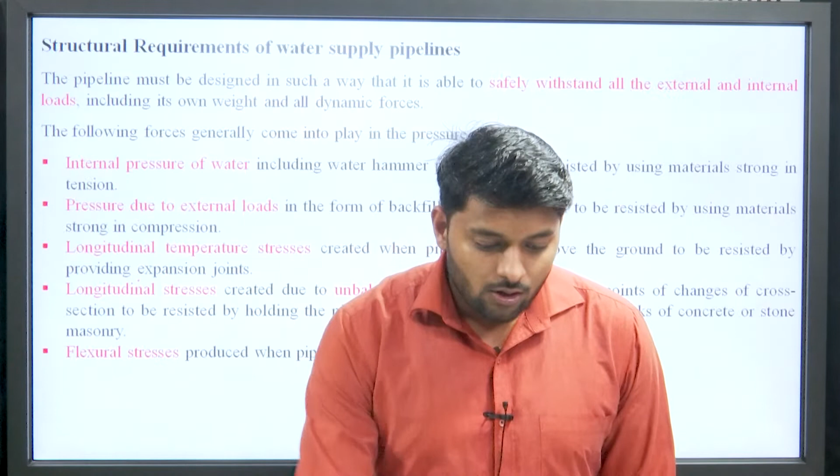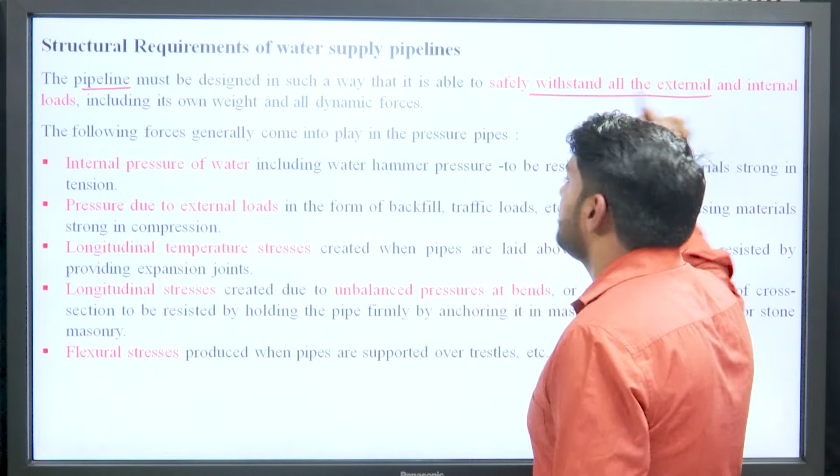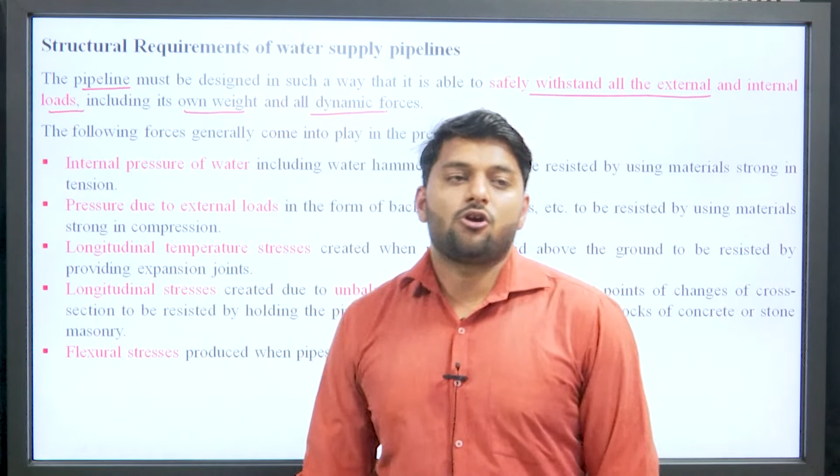What is the structural requirement of water supply pipelines? Basically, the pipeline which we design for water supply should be capable of withstanding all external as well as internal loads, its own weight, and different dynamic forces acting on the pipe must also be considered.

When we group all the different forces, the following forces come into play. First is internal pressure of water, which includes water hammer pressure. This water hammer pressure is resisted by the pipe material itself, and the pipe material used should be strong in tension.

Next is pressure due to external loads, which includes backfill, meaning the external loads can be in the form of backfill or traffic loads. This type of pressure is again resisted by the pipe material, and that pipe material should be strong in compression.

In case of water hammer pressure, the pipe should be strong in tension, while in case of external loads, the pipe should be strong in compression.

Coming to the next stress, that is longitudinal temperature stress. This type of stress comes into existence when the pipes are laid above the ground, and it can be resisted by providing an expansion joint.

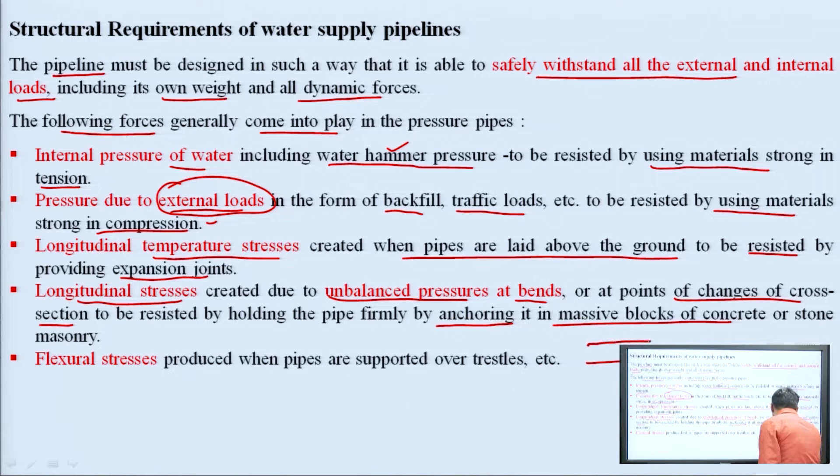At point A there is a bend, and at that particular point there is development of an unbalanced force, and because of that unbalanced force there will be development of a longitudinal stress.

Coming to the next stress, that is flexural stress. Flexural stress is produced when the pipe is supported over trestles. For example, these two are supports and the pipe is passing above it. What happens when water flows through this pipe? The pipe tries to bend, and there will be development of flexural stress.

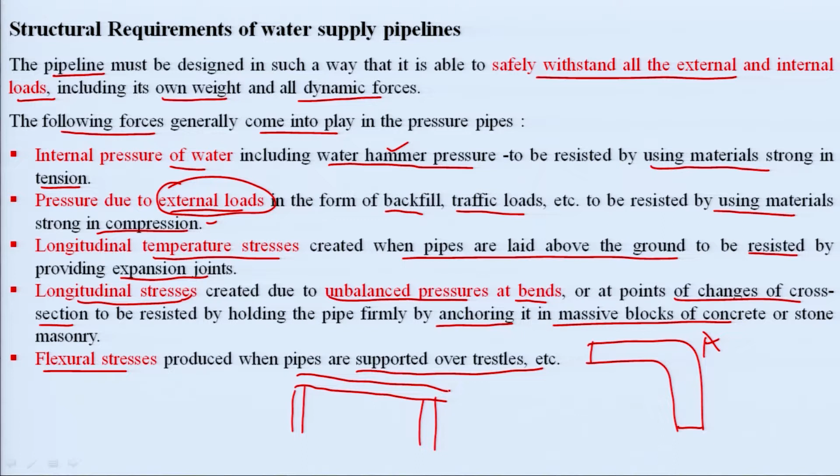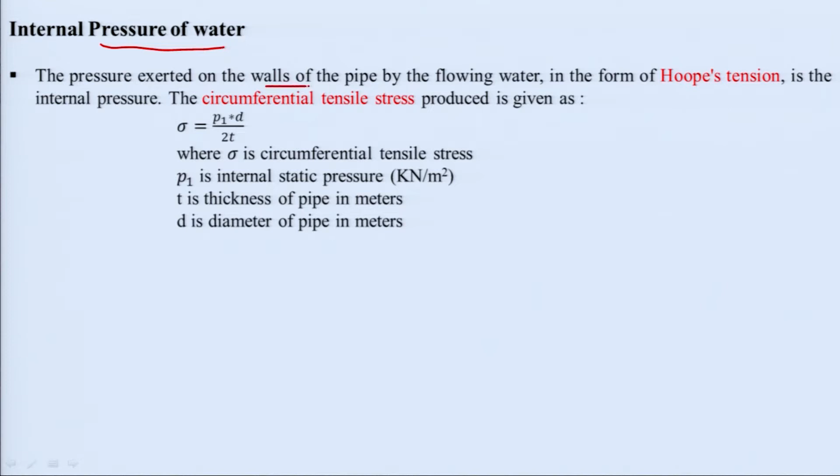What will be the internal pressure of water, or how can we calculate it? As the pressure is exerted on the walls of the pipe by the flowing water in the form of hoop tension, the value of circumferential tensile stress will be sigma equals P into D by 2 into T. How can we get that value?

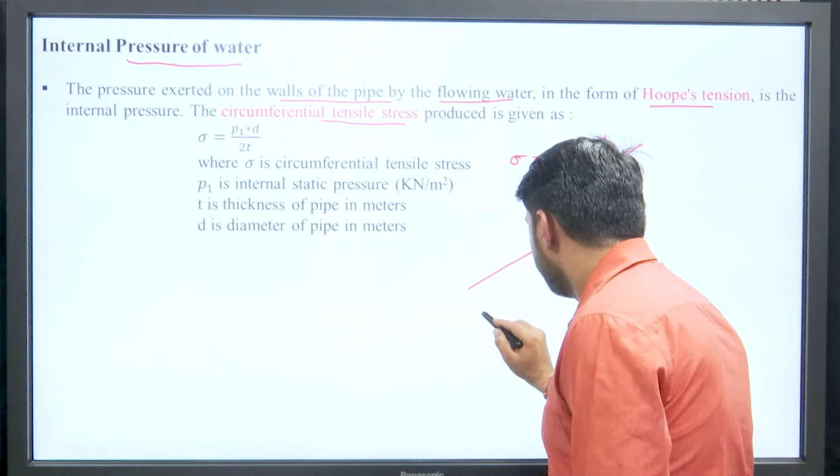Consider a pipe. The pipe is having a thickness T. So there will be existence of pressure and that pressure will be resisted by stress. Here, a stress develops and that value is sigma. A similar stress will develop on the other side.

What will be the value of force? In order to get the force, we simply multiply sigma by area, sigma into area. What will be the area? Its area will be equal to L into T, meaning the length and the thickness of that particular pipe. As the stress develops on both sides, it will be multiplied by 2, meaning force developed equals 2 sigma into L into T. And what pressure is applied by the water?

That pressure will be on that particular portion. So if we draw its top view, it will look like that, the pressure exerted by water from that much portion. In order to get the value of force, we simply multiply pressure into area. What will be the area? Its area will be diameter into length of pipe.

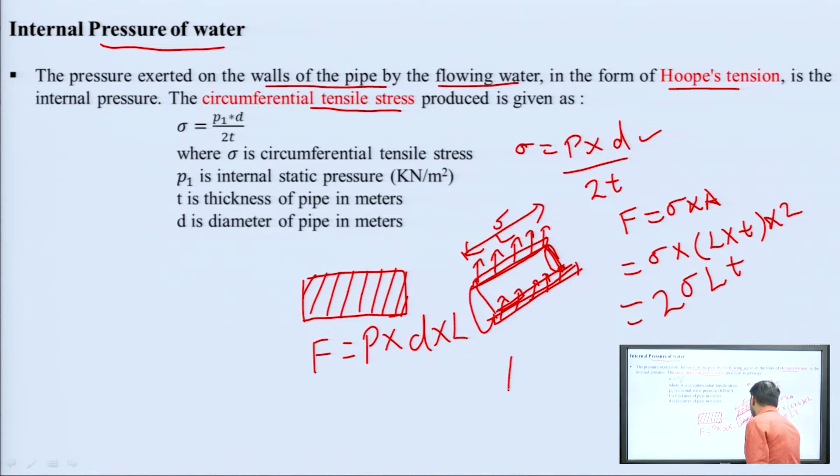Equating both the values, what do we get? P into D into L equals 2 into sigma into L into T. L cancels out, and sigma will be P into D by 2T. So this is the value of sigma.

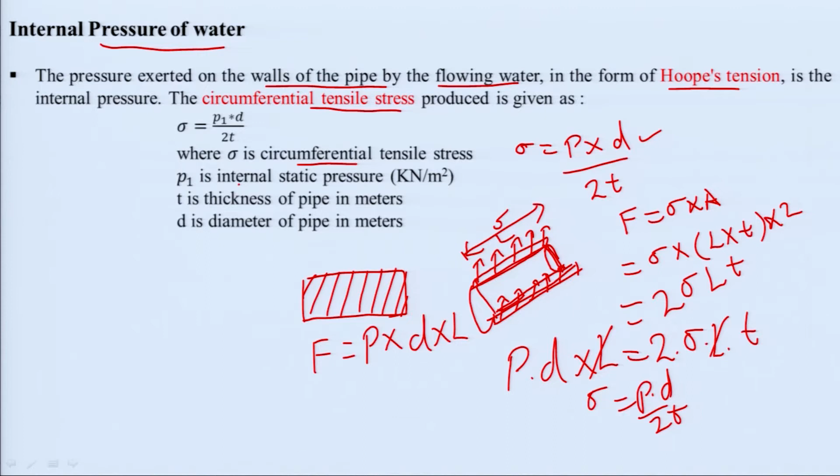And how can we get the value of sigma? Here sigma is the circumferential tensile stress, P1 is the internal static pressure in kilonewton per meter square, T is the thickness of pipe in meters, and D is the diameter of pipe in meters.

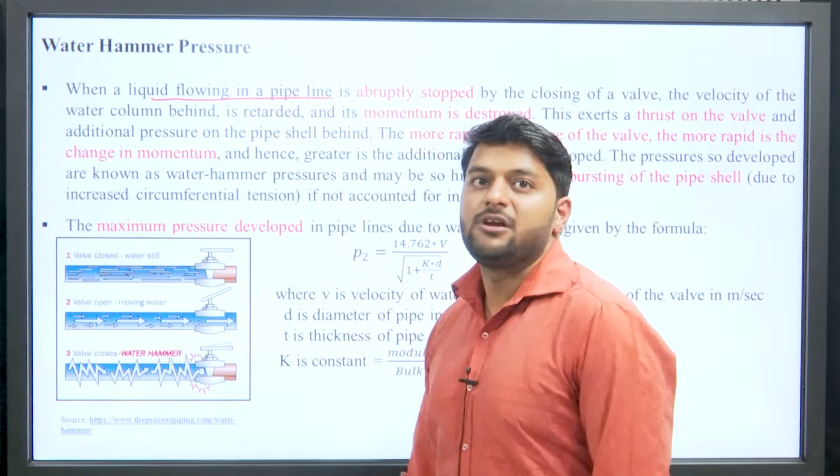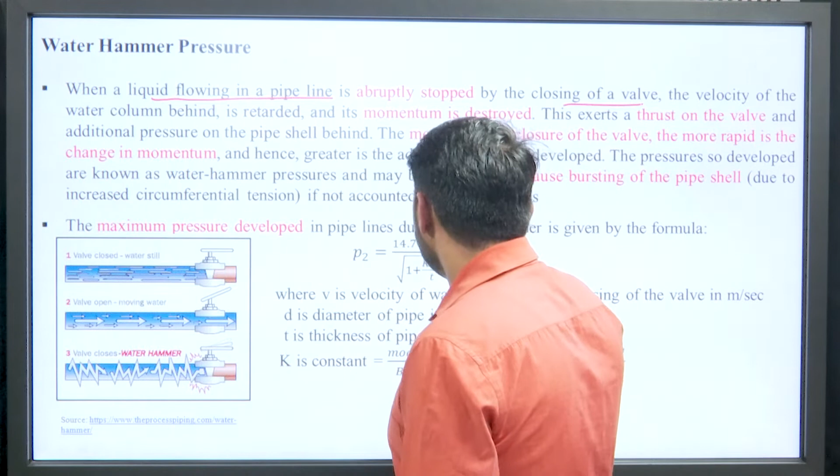Next is water hammer pressure. What is water hammer pressure? Basically, when a liquid flowing in a pipeline is abruptly stopped, by closing a valve, the velocity reduces to zero. If the velocity reduces, momentum is destroyed, meaning momentum also reduces, and this exerts a thrust on the valve and additional pressure on the pipe shell behind.

This is the case where water is flowing continuously. If we are going to close the valve, what will happen? The valve is closed and the flow of water is abruptly stopped, and the flow of water exerts pressure on the valve as well as the surrounding shell of the pipe.

What results? The more rapid the closure of the valve, the more rapid is the change in momentum, and greater will be the additional pressure developed. Rapid closure of valve means rapid change in momentum, and greater development of additional pressure. This pressure so developed is known as water hammer pressure.

The pressure developed because of the sudden closure of valve will be known as water hammer pressure. And what will be the result? It will cause the bursting of the pipe. The pressure becomes so high that it bursts the pipe.

How can we calculate that particular pressure? For estimating the value of water hammer pressure, we use the expression P2 equals 14.762 into velocity. Here P2 is water hammer pressure, and V is the velocity of water flow just before closing the valve, in meters per second.

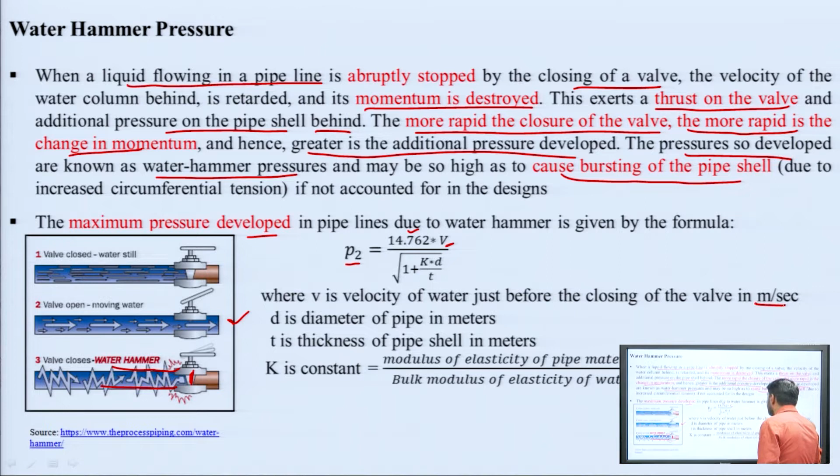What is D? D is the diameter of pipe, and T is the thickness of pipe. K is a constant, which is the ratio of modulus of elasticity of pipe material and bulk modulus of elasticity of water.

How can we get the value of K? For steel, the value of K comes out to be 0.01. For different pipe materials, the value of constant K will be different. For cast iron pipe, the value of K is taken as 0.02, and for cement concrete pipe, the value of K is taken as 0.1.

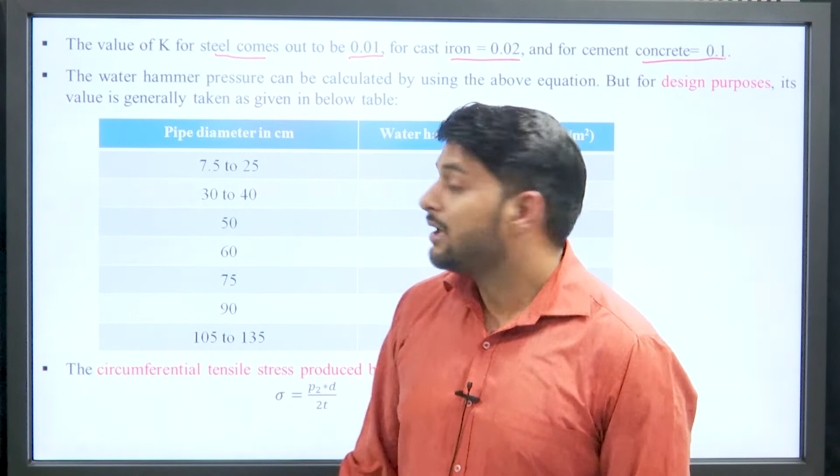While designing the water supply system, what value of water hammer pressure should be taken? For design purposes, if values are not given, we can take this much water hammer pressure for different diameters of pipes. This water hammer pressure can also be calculated using the formula mentioned earlier.

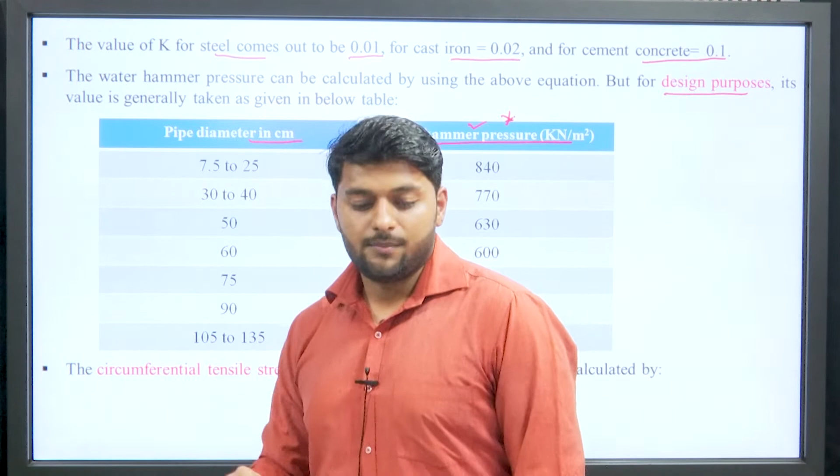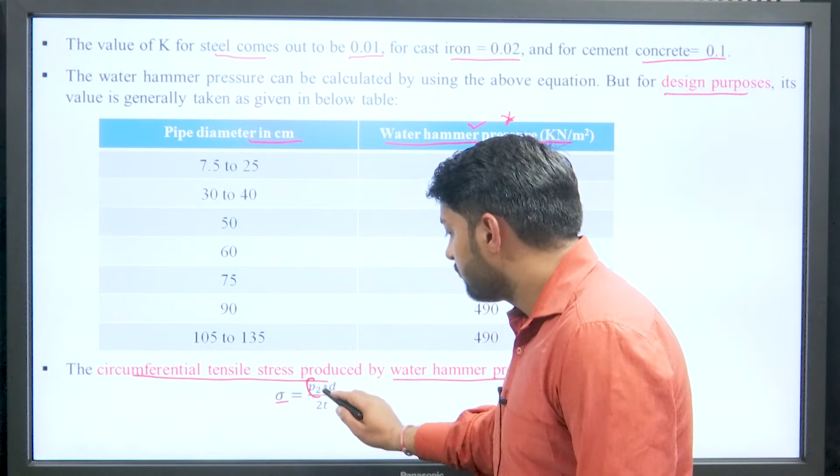Next, the circumferential tensile stress — we are going to convert water hammer pressure into the form of stress. The circumferential tensile stress produced by water hammer pressure is: Sigma equals P2 into d by 2t, where P2 is the pressure because of water hammer action.

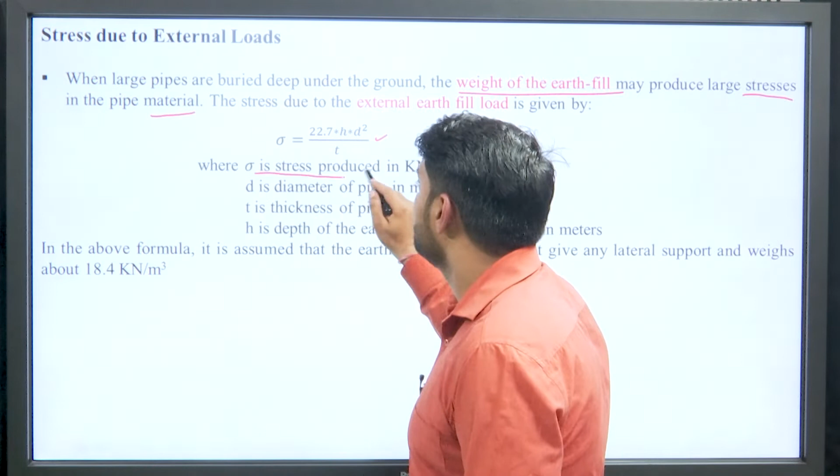Next is stress due to external loads. These external loads are backfills which produce stress in the pipe material, and this stress can be calculated using the expression sigma equals 22.7 into h into d square by t, where sigma is stress produced in kilonewton per meter square, d is the diameter of pipe in meter, t is the thickness of pipe, and h is...

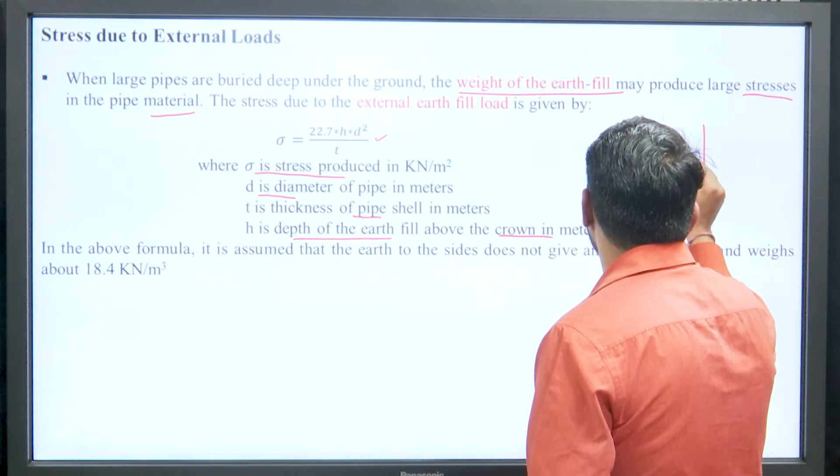H is the depth of earth fill taken above the crown. For example, if this is a pipe and this is the portion where the pipe is laid, the value of h will be this much — the depth of earth fill taken above the crown.

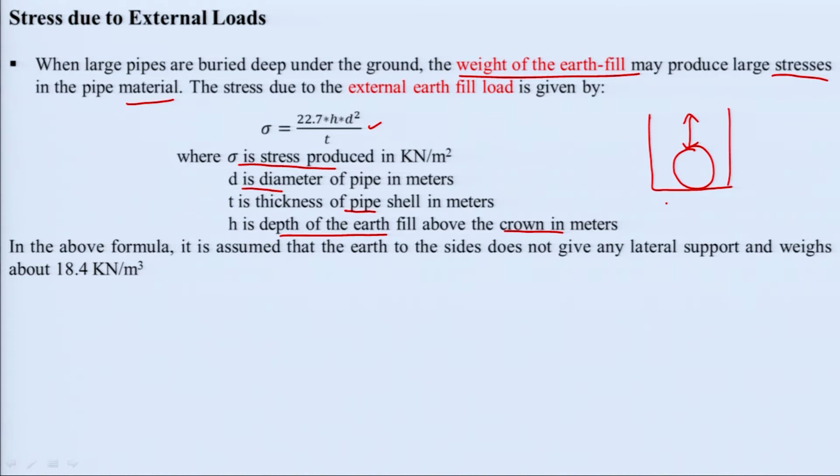In the above formula, it is assumed — since the formula is derived with certain assumptions — that the earth to the side does not give any lateral support, and the weight is about 18.4 kilonewton per meter cube.

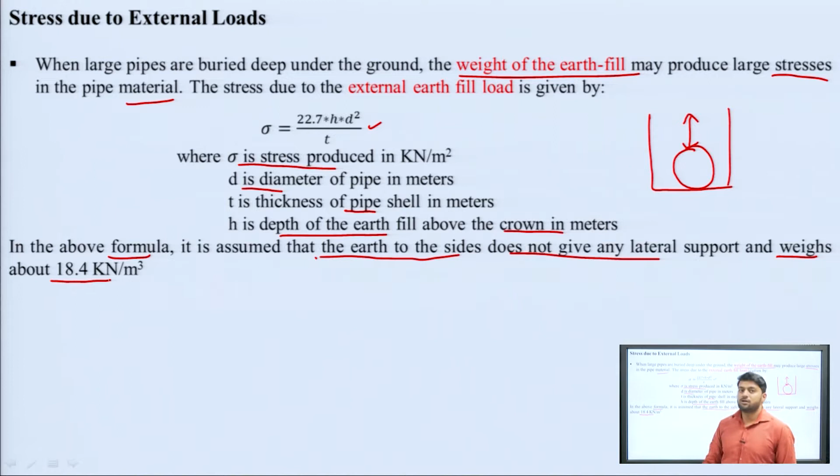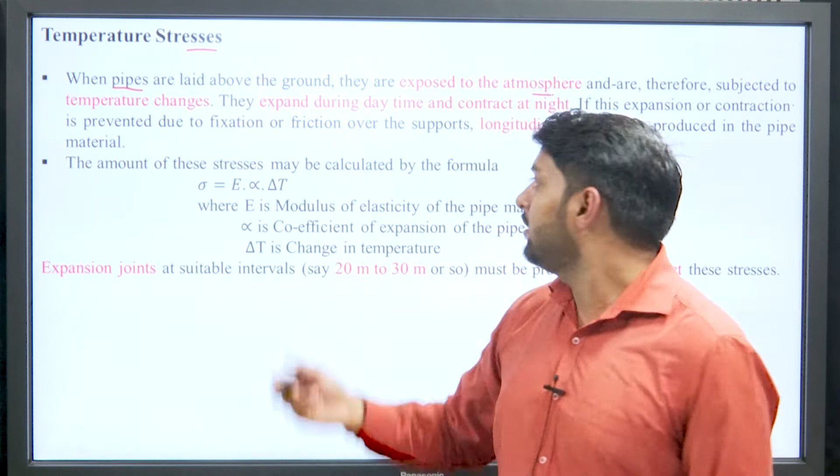Coming to next, that is temperature stresses. This type of stress develops because of variation in temperature, and generally occurs when the pipe is laid above the ground, meaning the pipe is exposed to atmosphere. When exposed to atmosphere, there will be change in temperature, and the pipe will expand during daytime and contract during night time.

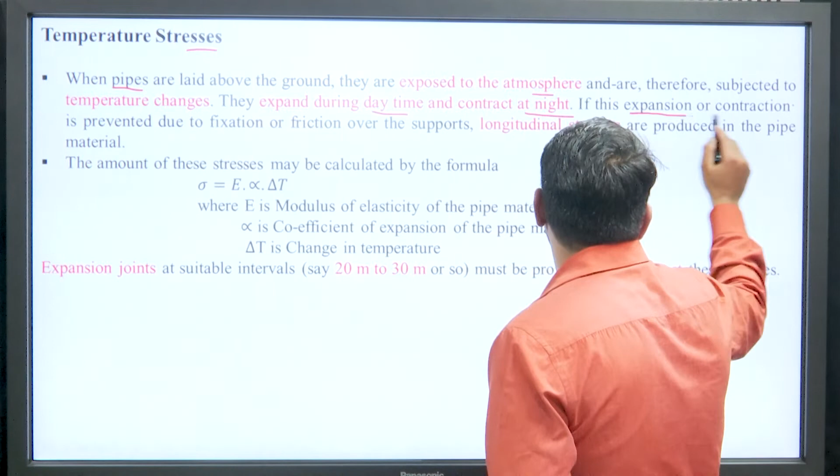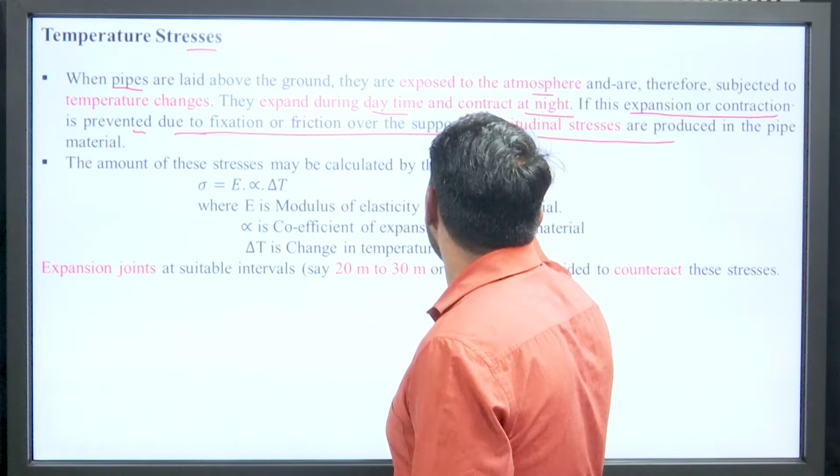Our target is to neutralize this expansion and contraction. This can be prevented by using an expansion joint. We can control it by providing an expansion joint. If this expansion or contraction is prevented due to fixation or friction over the support, longitudinal stresses are produced in the pipe material.

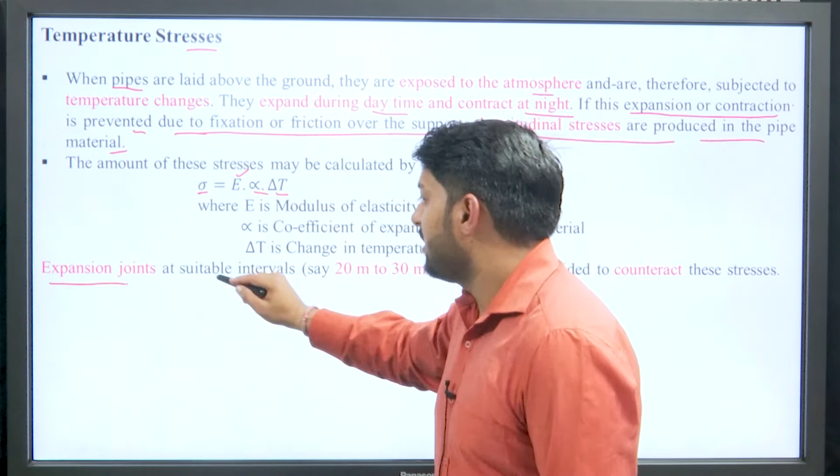So there will be development of longitudinal stress. What will be the value of temperature stress? Temperature stress equals E into alpha into delta T, where E is modulus of elasticity, alpha is the coefficient of thermal expansion which depends on pipe material, and delta T is the change in temperature. To counteract that stress, expansion joints should be provided at an interval of 20 to 30 meters, which counteracts the temperature stress.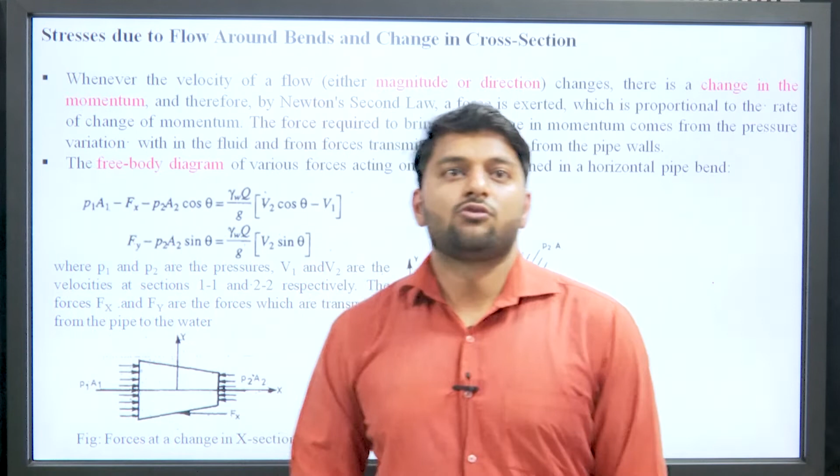Next one is stress due to flow at the bend, where what is developed?

There is a development of unbalanced pressure whenever the velocity of flow changes, and that change should be in the form of magnitude or direction. There is a change in momentum, and we all are aware that according to Newton's second law, force should be exerted because force is directly proportional to change in momentum. The force required to bring this change in momentum comes from pressure variation within the fluid.

There is also a possibility that if the cross section changes, there will be a pressure variation, and forces transmitted to the fluid from the pipe walls. When we are going to draw the free body diagram, the diagram should be like that.

This is section 11 and this is section 22. What will be the force? Here the force will be pressure multiplied by the cross sectional area at point 11, and what will the force be at point 2, section 22? Here the force will be pressure multiplied by area at section 22, and there also comes a force in direction x and a force in direction Fy. What we are going to do is simply equate force equals to change in momentum.

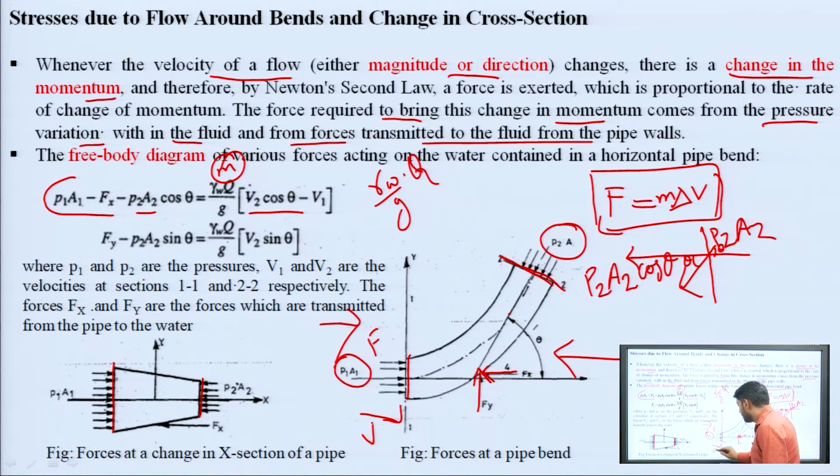Here at point 1 velocity is V1, and here the velocity will be V2. When we resolve it again, the component in x direction is V2 cos theta. So final velocity minus initial velocity is V2 cos theta minus V1, and in Fy direction the force acting upward is Fy.

The force in downward direction is P2 A2 sin theta. So that will be Fy minus P2 A2 sin theta equals to change in momentum, mass into velocity. The component of velocity in y direction at point 1 is 0, and at point 2 is V2 sin theta. So this can be written as V2 sin theta minus 0.

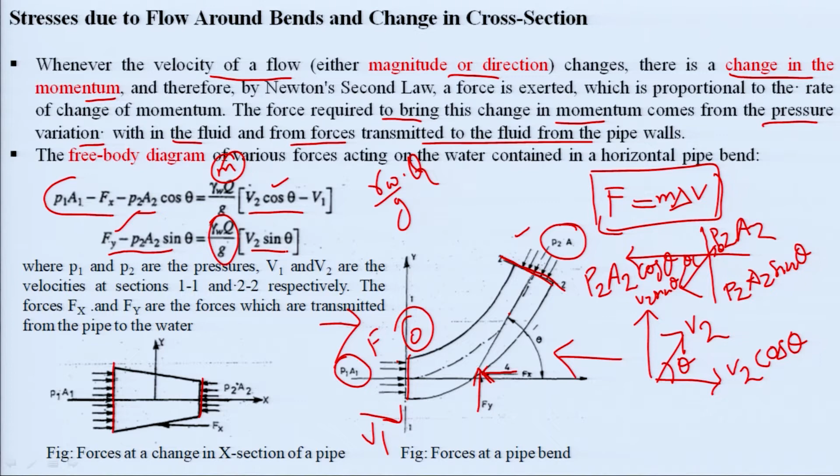So by using these two equations we can estimate the value of Fx and Fy at a point where a bend is observed. Next one is flexural stress.

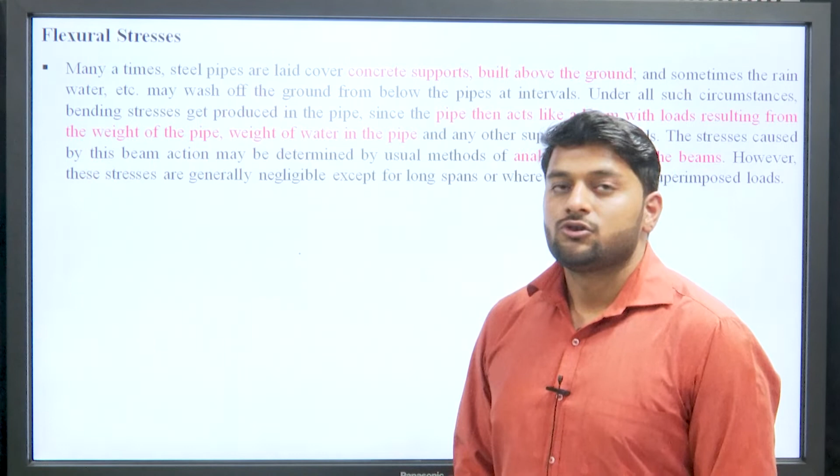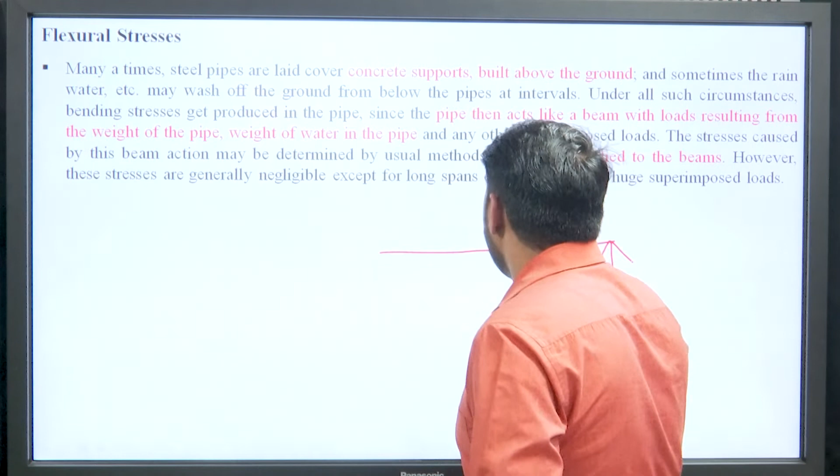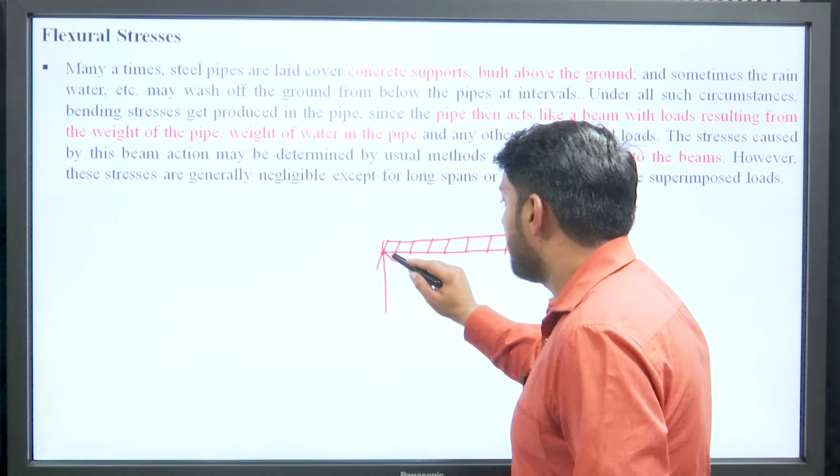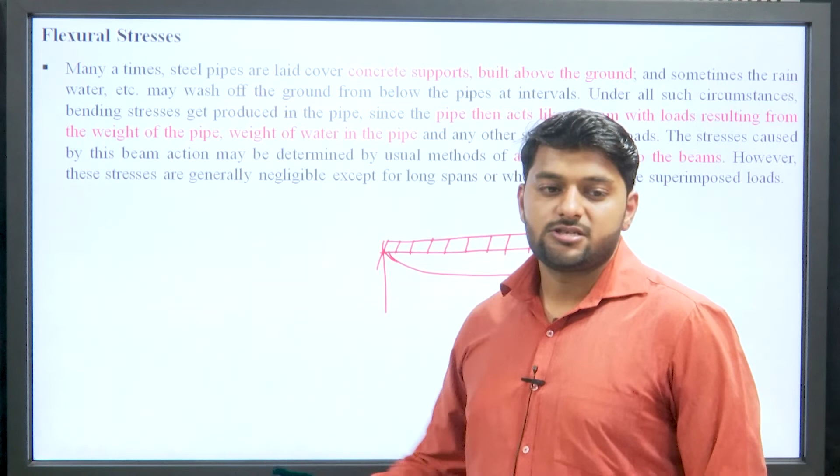Coming to flexural stress, this type of stress develops when the pipes are laid above the ground and supports are given at regular intervals. The pipe will act like a beam and the columns will act like a support, and when water passes through it, the weight of water as well as the weight of the pipe itself tries to bend that particular pipe. By resisting that load or self weight of the pipe, there is a development of flexural stress. This is a form of stress which develops in a pipe because of supports.

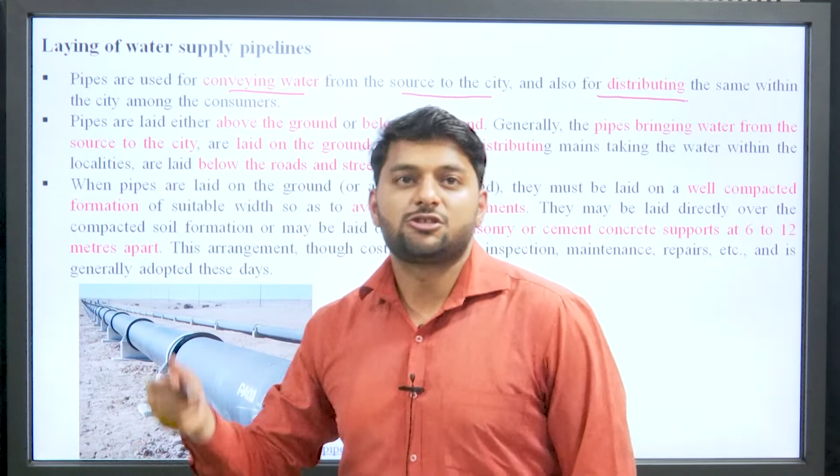Next comes laying of water supply pipeline. Basically pipes are used for conveying water from source to city and also for distributing the same within a city, so it can be used for transmission of water from source to city and then distributing the water in the city. This pipe can be laid above the ground or below the ground. Generally the pipe bringing water from source to city is laid on the ground.

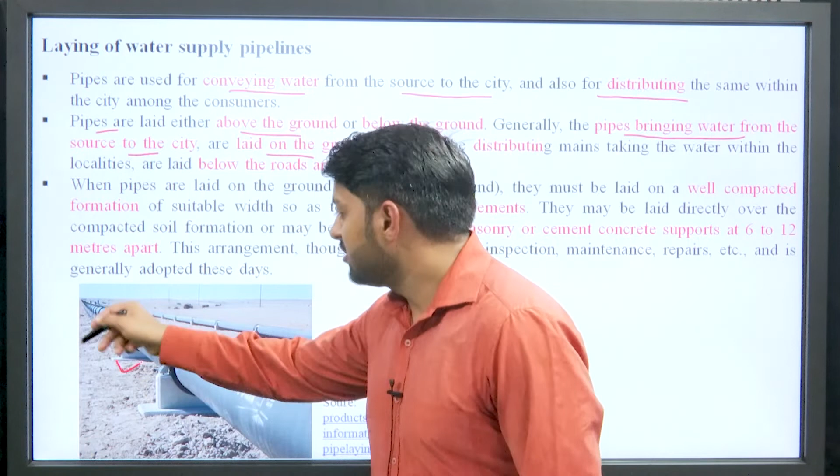This is a picture which is just showing how the pipe is laid above the ground. Whereas the pipe used for distributing, because the distribution system is designed in a city, it is not practically possible that the pipe is always exposed above the ground. In that case the pipe is laid below the road and streets.

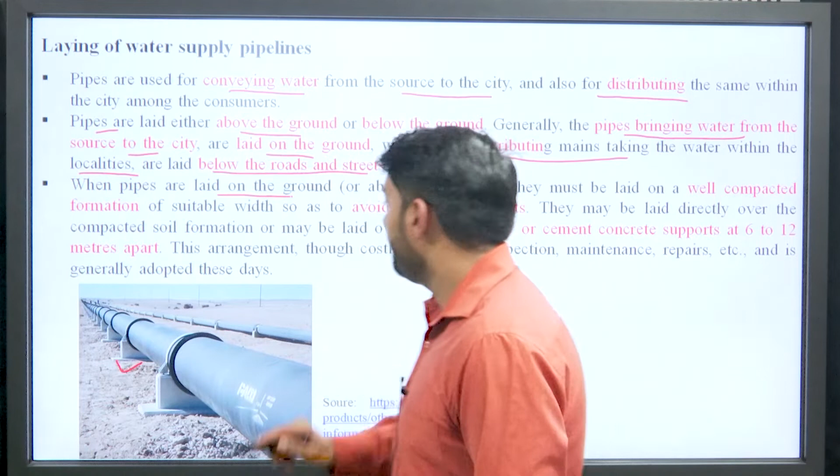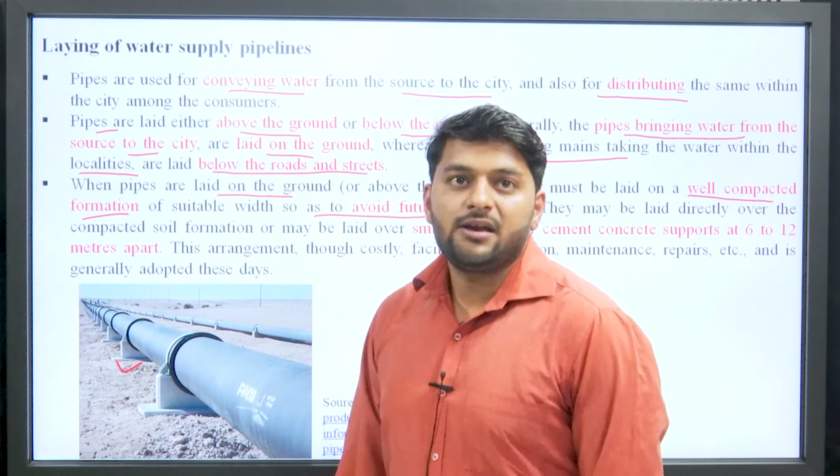When the pipe is laid on the ground, we have to compact the ground surface. Why should compaction be done? Compaction should be done in order to avoid settlement in the future, and it is mandatory that the pipe should not be laid just above the ground.

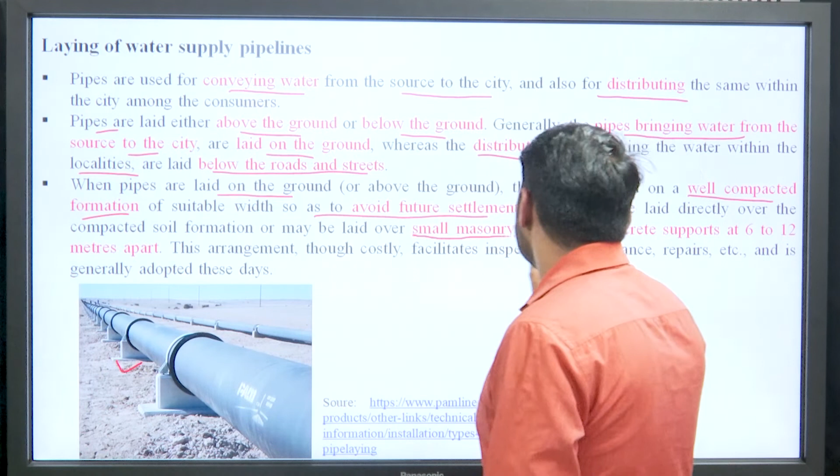It should be laid over small masonry or cement concrete supports at an interval of 6 to 12 meters apart. This arrangement will be helpful in order to perform the maintenance work, repair work, or inspection work.

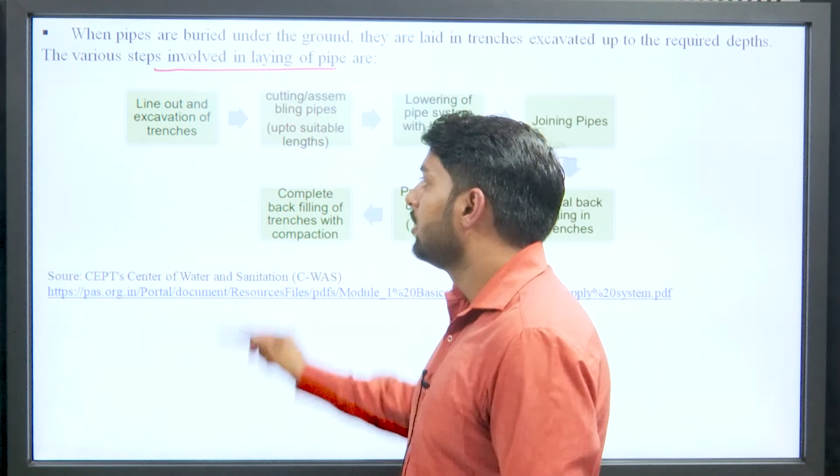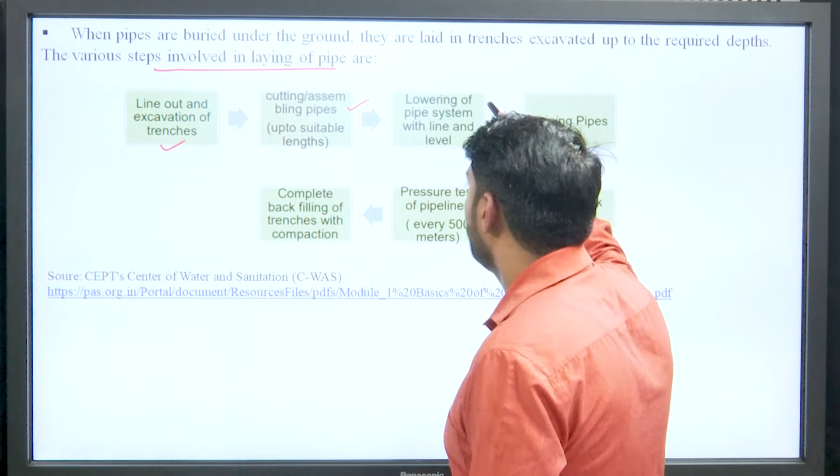Firstly, what we have to do? Basically, we have to line out and excavate the trench. After excavation, we use pipe of suitable length, and after getting the pipe, we lower the pipe in the trenches. After lowering the pipe in the trenches, we join the pipes.

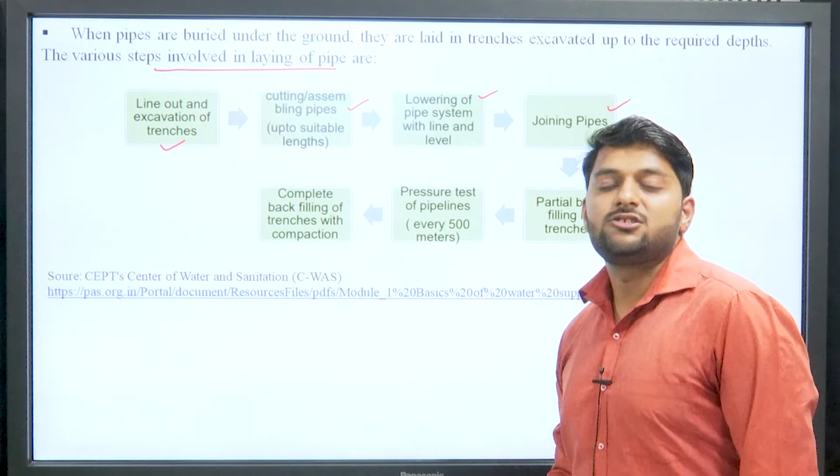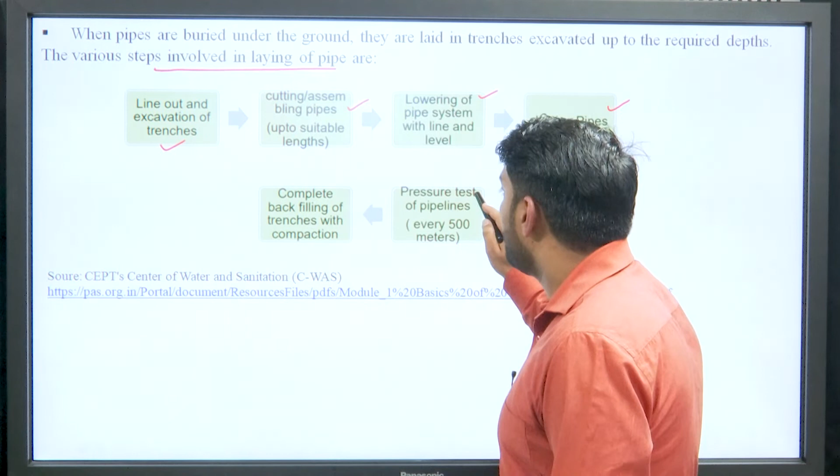After joining the pipe, we partially fill the trenches. Why partially filling the trenches? Because we have to perform the pressure test. After performing the pressure test, we can completely fill the trench and compact it.

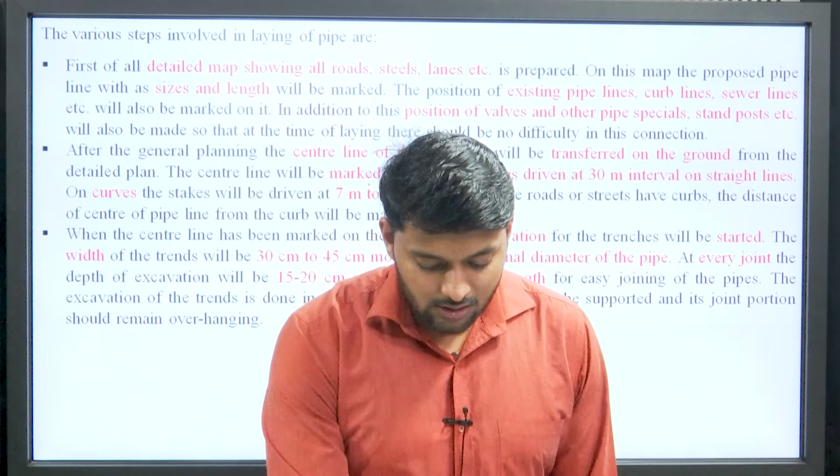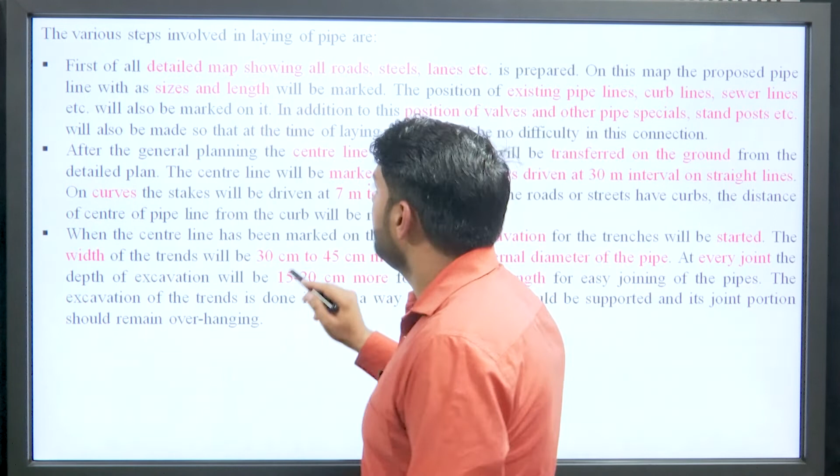So these steps are elaborated in the following steps. In order to line out or mark the distribution system, we need a detailed map which shows roads, streets, lanes, so we can plan for it.

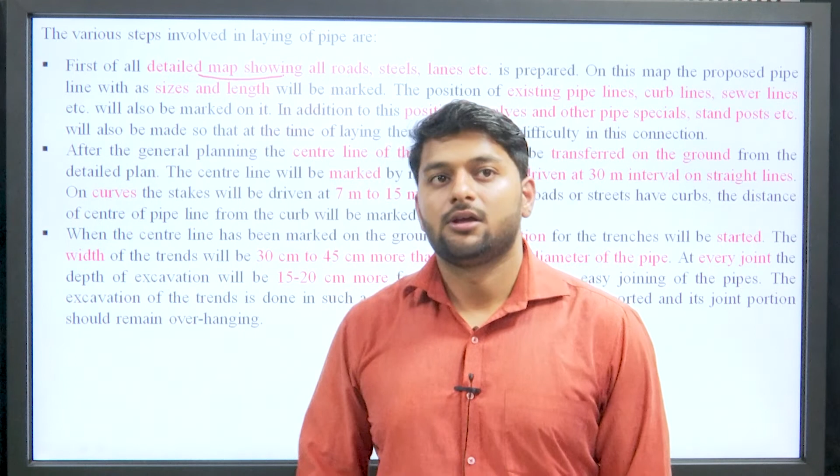After getting the maps, what we are going to do? We draw the center line of the pipe, and this center line should be transferred onto the ground.

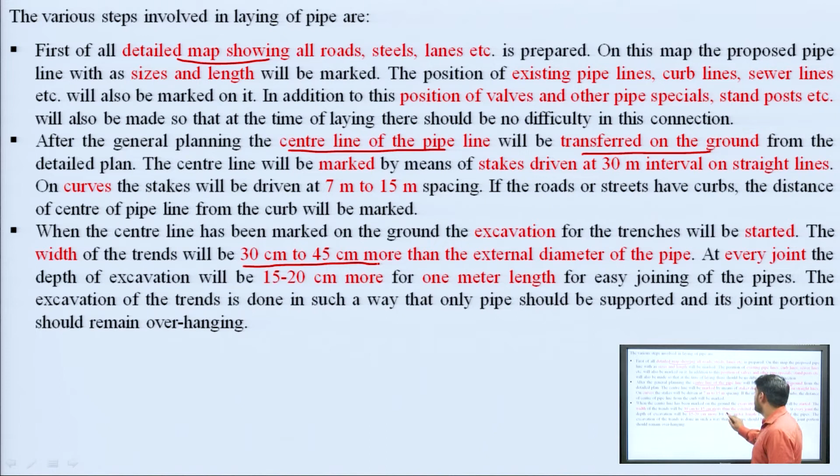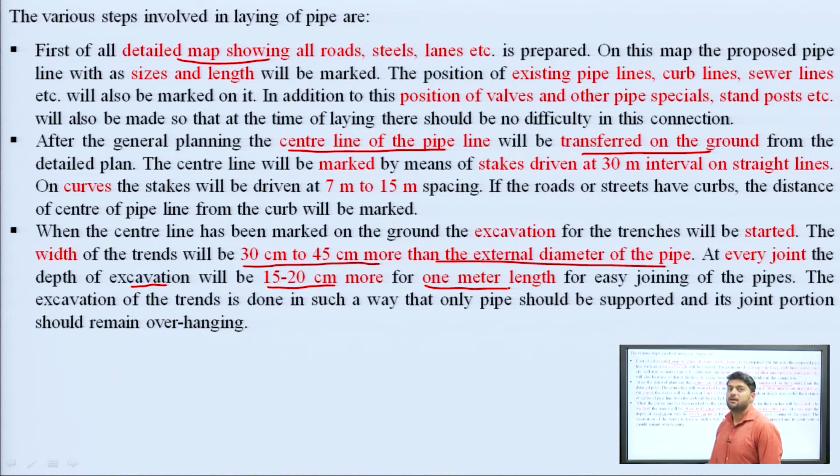After transferring to the ground, we excavate it. While excavating, certain points should be remembered: the width of the trench should be 30 to 45 centimeters more than the external diameter of the pipe, and at points where joints are made, the depth of excavation should be 15 to 20 centimeters more for 1 meter of length, so that joining of the pipe is easy.

The pipe should be laid more than 90 centimeters below the ground. Why 90 centimeters below the ground? Because the impact of traffic load can be minimized.

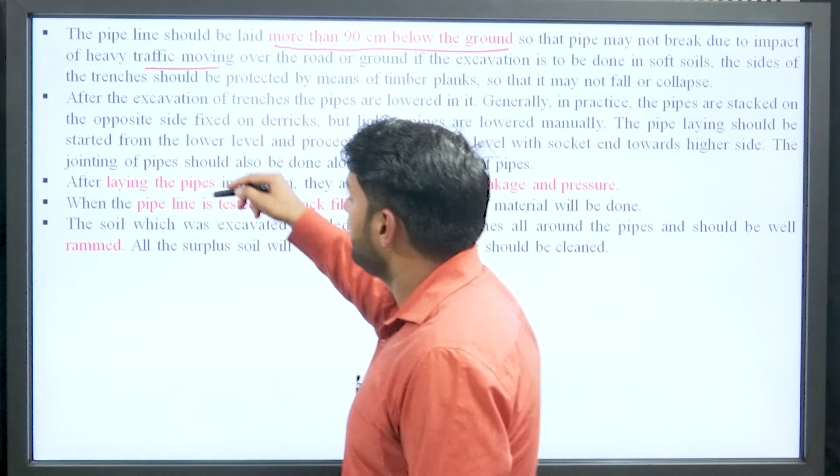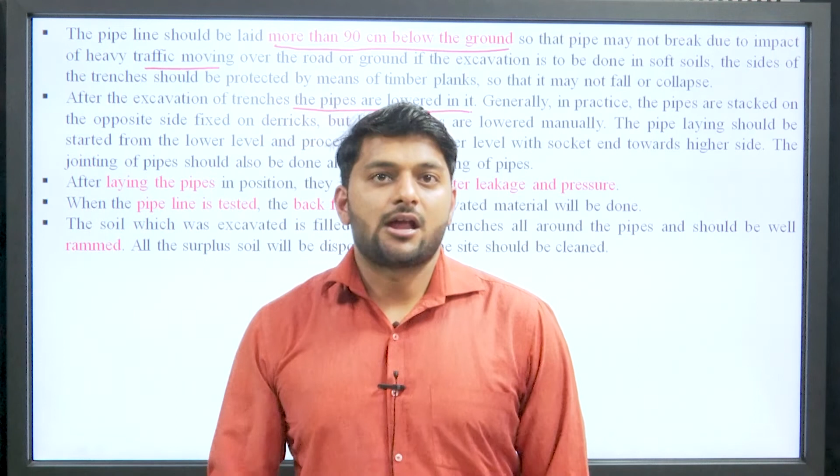After performing the excavation, the pipes are lowered in, and then we join them. After joining, we perform water leakage and pressure tests, and after successfully completing the test, we fill the trenches and compact them.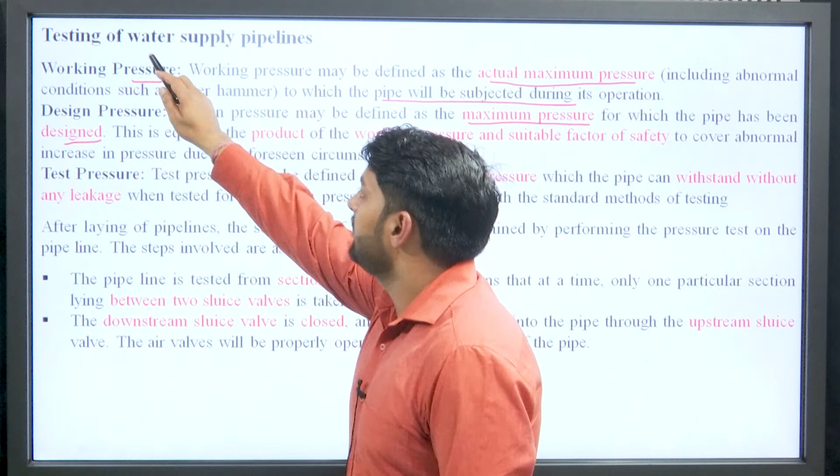What is design pressure? Design pressure is the maximum pressure for which the pipe has to be designed, and this is obtained by multiplying the working pressure with the factor of safety. When we multiply working pressure with the factor of safety, we get design pressure.

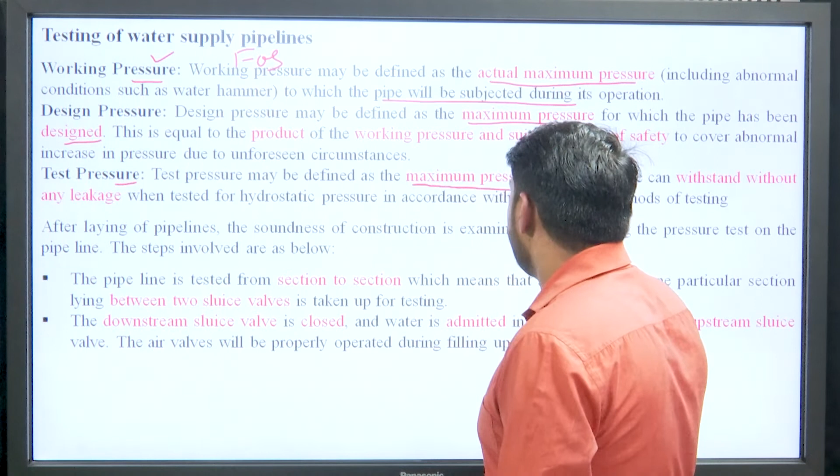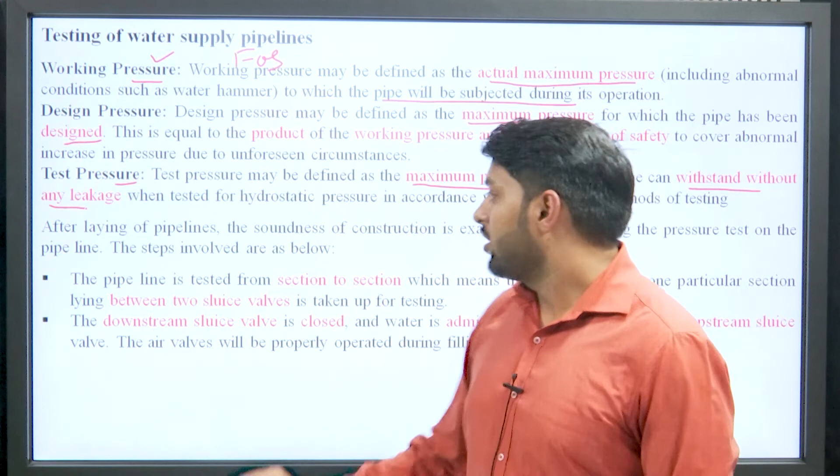Next is test pressure. Test pressure is the maximum pressure which the pipe can withstand without any leakage when we are going to test it for leakage. After laying of the pipeline, the soundness of construction is examined.

How is it examined? It is examined by performing a test, and the pipe is tested section by section. At a single time, we perform testing of a single section, and that particular section should be between two sluice valves.

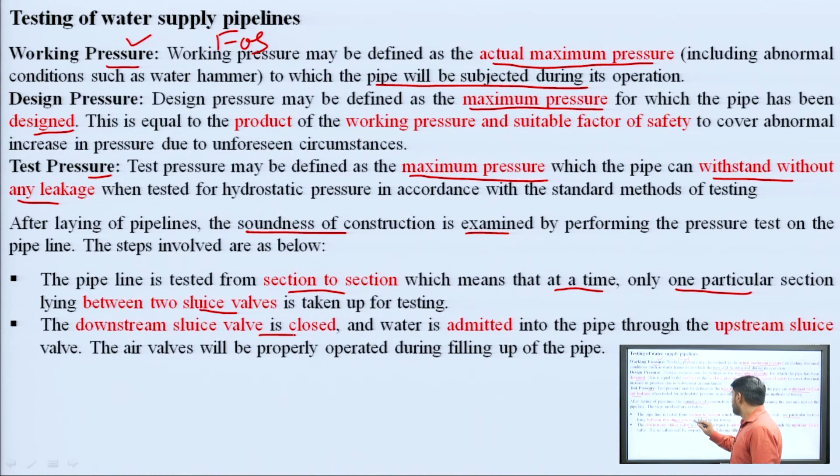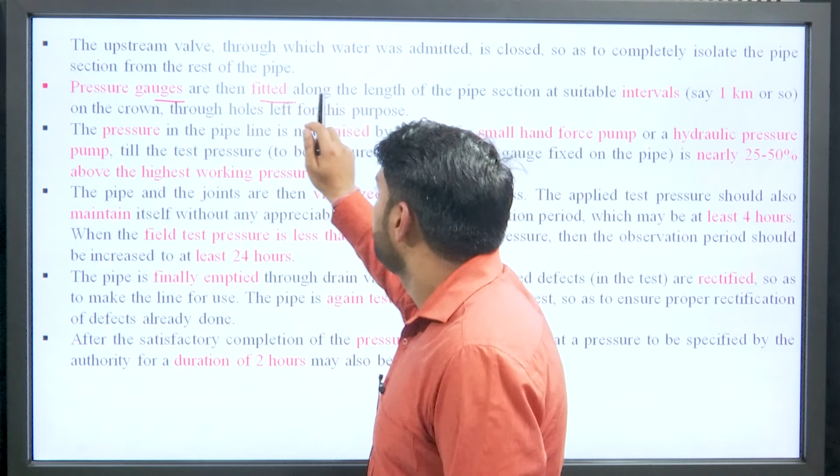The downstream sluice valve should be closed and water is allowed to enter from the upstream sluice valve. Next, we install pressure gauges at different points of the pipe along the length of the pipe section at a suitable interval, that is, 1 kilometer interval.

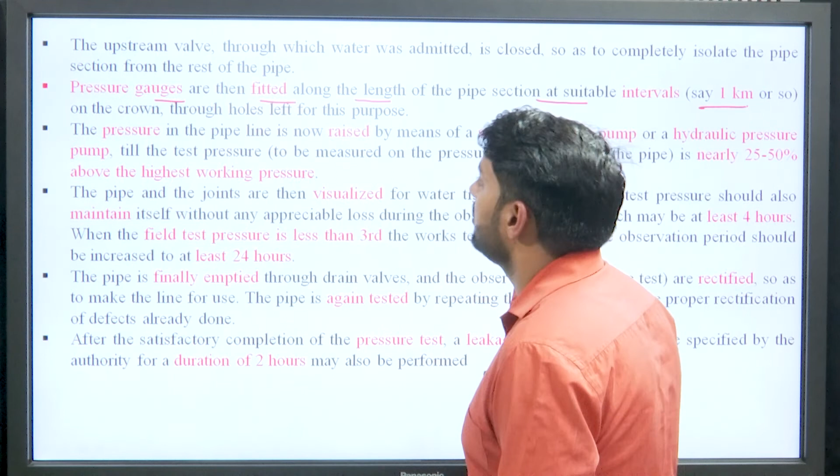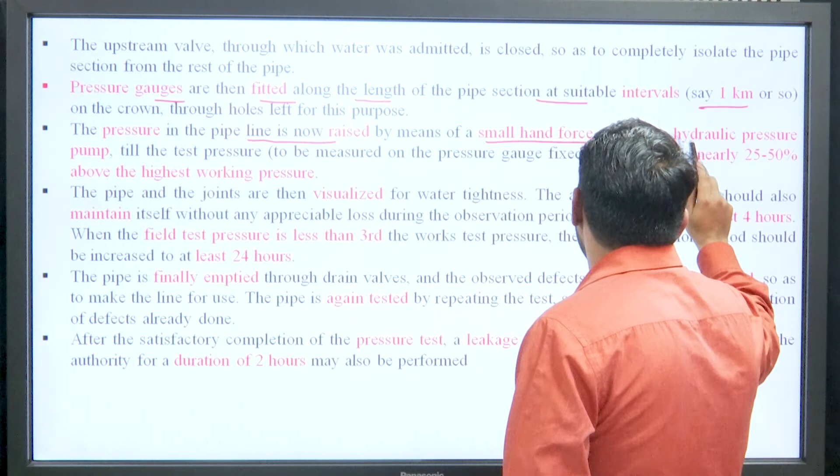Next, the pressure of the pipe is raised by means of a small hand force pump or a hydraulic pressure pump till the test pressure is achieved, and this test pressure is about 25 to 50% above the highest working pressure.

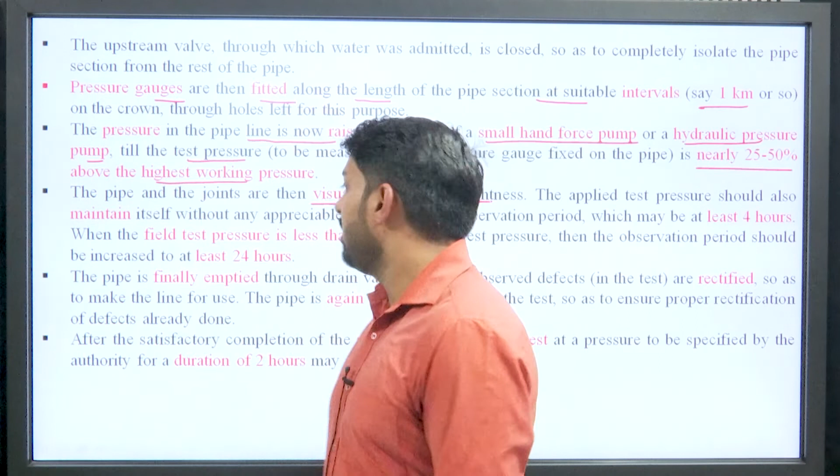Next, the pipe and joint are then visualized for water tightness. The applied pressure should be maintained for at least 4 hours. The pressure applied is maintained for 4 hours.

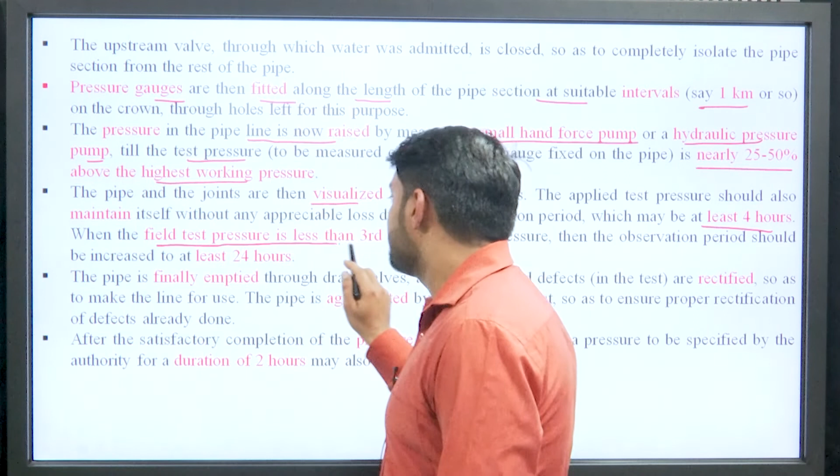When the field test pressure is less than one-third of the works test pressure, then the observation period should be increased to 24 hours.

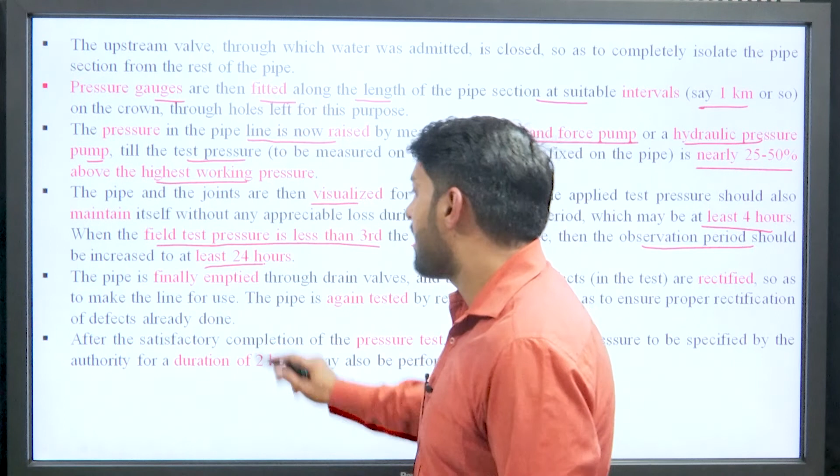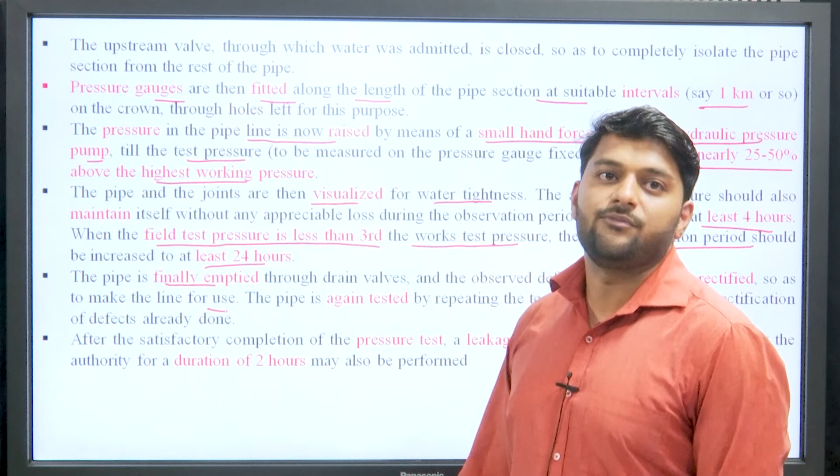After testing the pipe, if observation shows there is a leakage, then we repair it, and after repairing it we again test it, and if the test comes satisfactory, then that particular supply system comes into existence or comes into use.